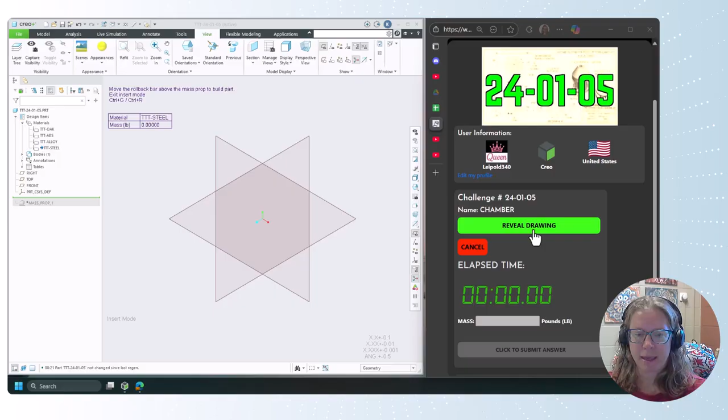And here we go. We're gonna start with that revolve. So we're gonna go in and revolve. And I can't say it often enough, revolves in Creo can be just a little picky, so make sure you get that axis of revolution added in there right away. So we're gonna really focus in over here on, oh, that's not working. That's all right.

On this cross section, we've got this overall height of 6.25, so we can, it's interesting, we don't go all the way to the center. All right, so we're gonna start, come down, right, down, over, up, in. I'm trying to avoid some of those equal signs.

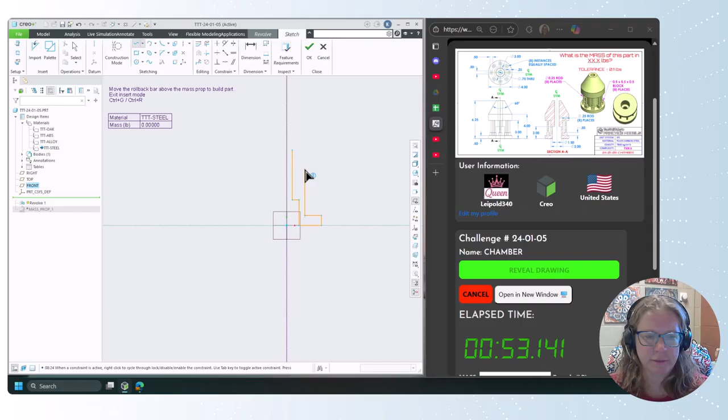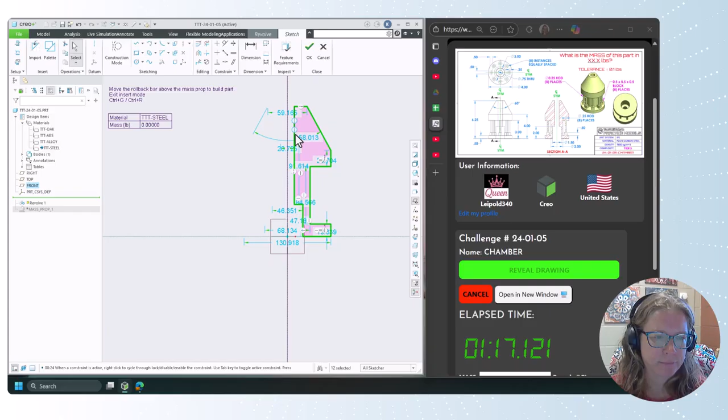I love the horizontals and verticals, but I don't necessarily want the same length, but I do want this one to be the same length. But I don't want, you can kind of see where it pops up, and I'm trying to avoid it. Okay. All right. One of the hiccups with Creo revolves is if the same line on the center line is not one long line, that can be an issue.

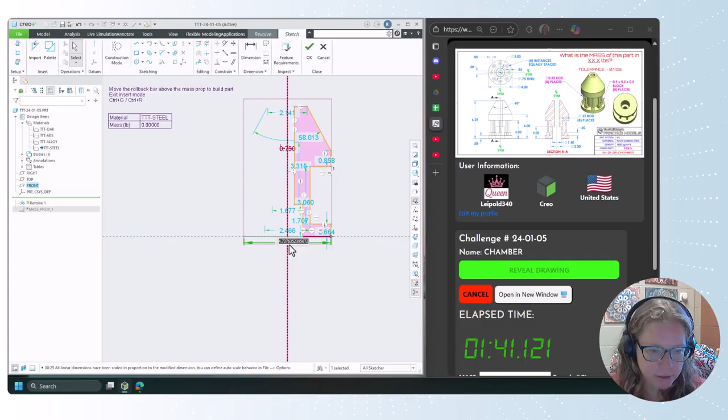All right, so let's see here. Where's a good number to start from? The inside diameter is 0.75, so we're going to make this 0.75. All right, my outer diameter, I'm not seeing here. The overall outer diameter is 4. Put that one on there. Let's add an overall height. Escape, that did not do the dimension I wanted. Let's try that again. Go.

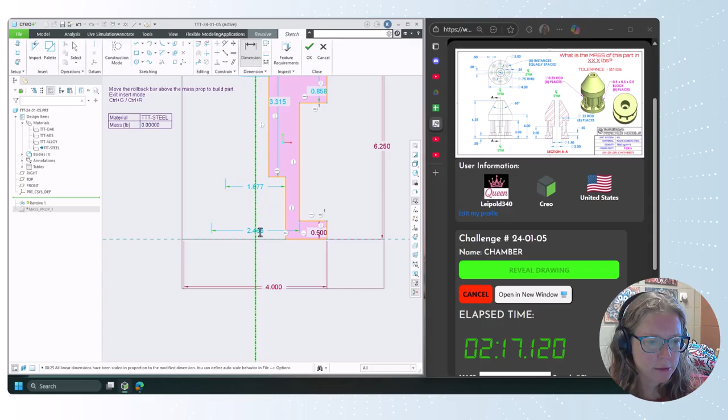This height down here is 0.5. This diameter is 2. This diameter is 1.5. Let's see here. I can add that height of 2 in there. Let's get that one added in. Let's get the height of 3. Let's get the height of 4.

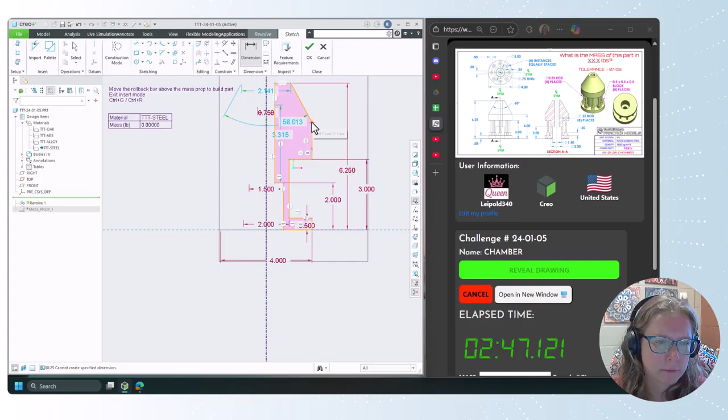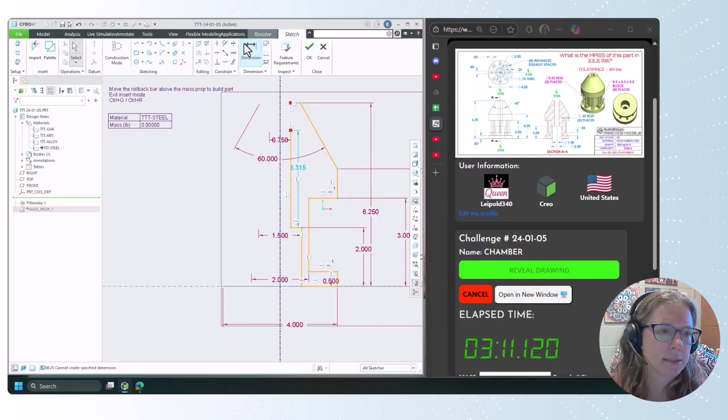What else? We need this diameter, or sorry, angle of 60. Okay, and that last number, we really don't need that. So what I'm gonna do, let's see if this works. I'm gonna hit delete that piece and corner these 2 lines. Hopefully get rid of that last weak dimension, and there we go. Beautiful. Nice revolve.

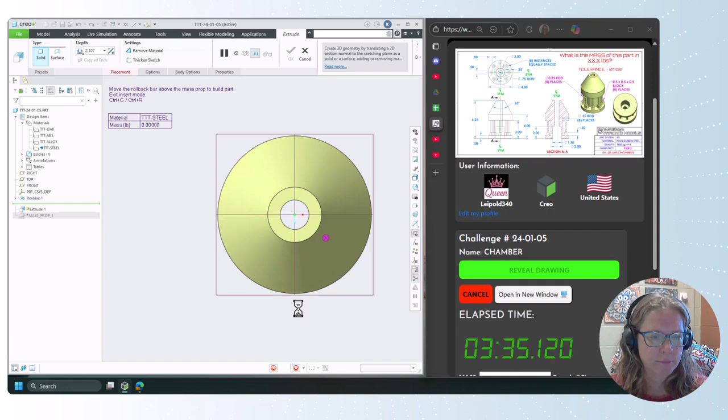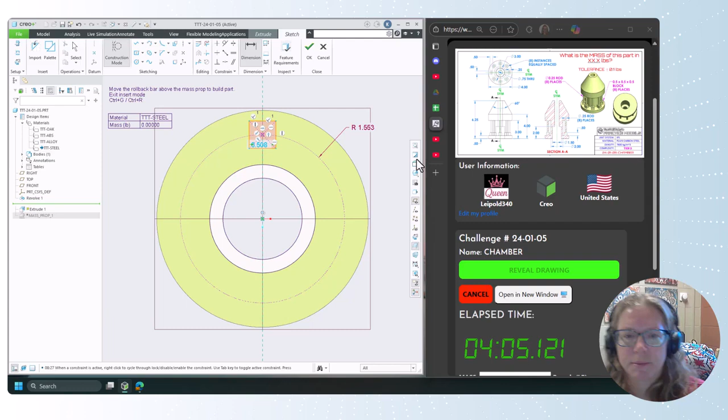Okay. Now we're gonna work on these little posts and get those patterns. So let's make an extrude. Okay, and we're going to take advantage of the cap. So I'm looking right at that geometry. I guess I'm drawing the one in the back right now. And it's located on a circle. So we're going to make this a construction circle. And that construction circle, usually when we dimension construction circles, it'll give us a radius. If we want it to be a diameter, the diameter 3, we can right click and switch it to a diameter. Give it 3, okay, and that is a square of 0.5.

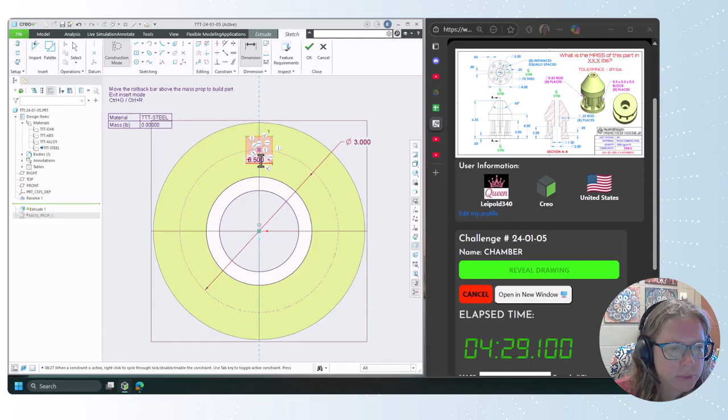I don't love how they show it as a square, but it is a square. So there's our first geometry. We're going to extrude that for a height of 0.5. Yep, okay, there it is. Let's get that patterned. And not a dimension pattern, but an axial pattern. And let's turn on our datum axis. The axis has to exist in time before the geometry. There's going to be 8 of those, and they should be equally spaced.

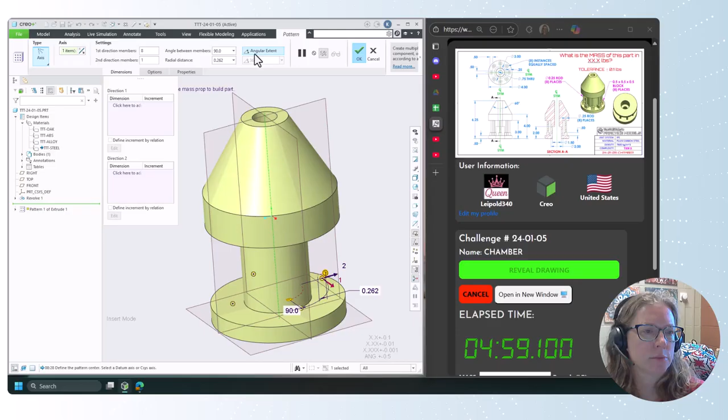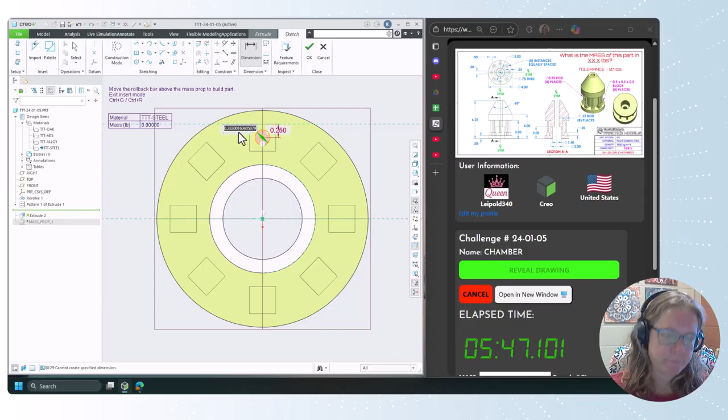Okay. So now I can go back in and extrude on the same shape. Again with my, take my cut there, make a circle. Let's see here. It doesn't look like it's showing where the center of that is, but it does look like we can dimension from the edge. That is giving us 0.25. That is given. Okay. And that diameter of that post is, I'm assuming it's 0.25. There it is, 0.25. Okay. And when this gets extruded, we're going to go up to next.

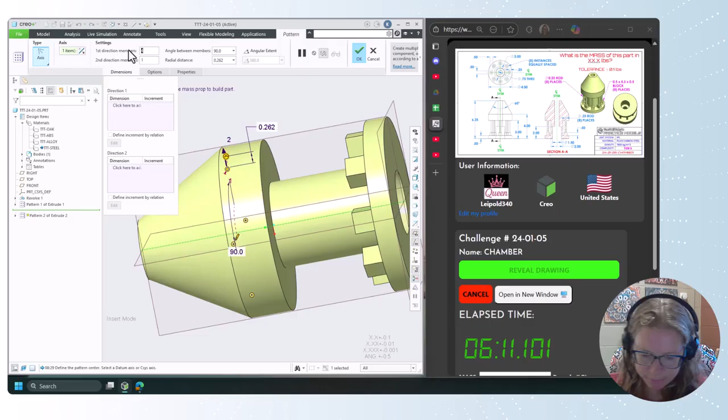Okay. And then we'll pattern that, and that'll give us, oh, I was hoping it would give me a reference pattern. That's all right. Setting this to 8 is pretty easy. If you wanted to group them and pattern it once, you could. This is looking right. Let's see how we did. 10.4 pounds. Beautiful.

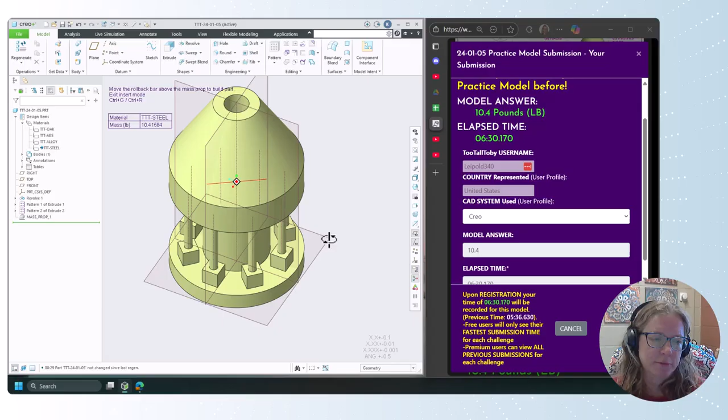A little bit fast or slower than my previous fastest time, but revolves, dimensioning, patterning, axial patterning. And don't forget that clip to view option. Very nice. Okay. All right.